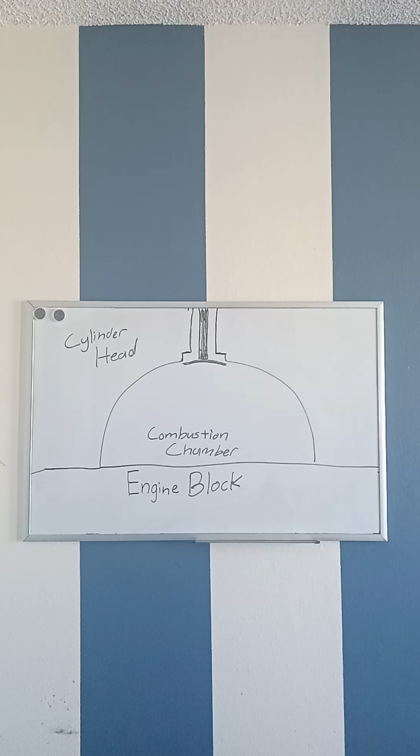Good afternoon everyone. I'm showing you guys the next stage of what we're doing on this LS swap build for this OBS project, turbocharged, using the L33. We've gone to the point of doing the porting and polishing for the cylinder heads, but we're also going to talk about the 3-angle valve job, and the camshaft we used.

So a lot of you guys want to know what a 3-angle valve job is. You see here, this upper part is our cylinder head, there's our engine block, there's a combustion chamber, and there's our valve.

Now on the valve, it comes up to seal to a flat surface here. You can see here 3 different angles. What happens is you try to get it to have a full seal. Having a 3-angle valve job is having the perfect angles on these sides here. Usually you do like a valve lap.

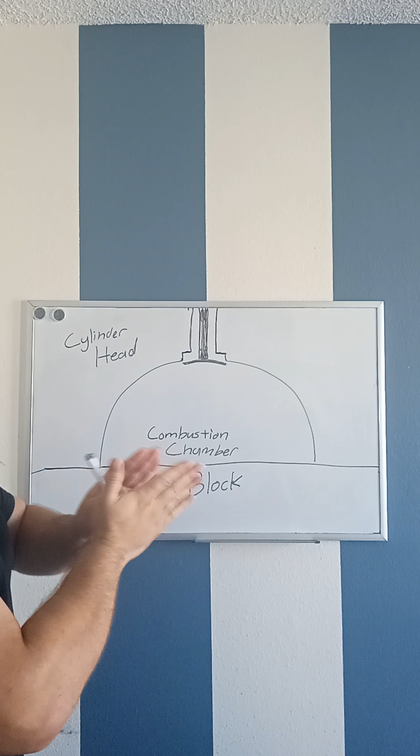There's also certain fluids you can use to help grab a hold, stick to a magnet onto your valve, press it into the angles, and scrape off, spinning it to a certain angle. You can use a drill, but I usually like to use my hand, just to scrape off any rough surfaces on the intake and exhaust ports of a cylinder head.

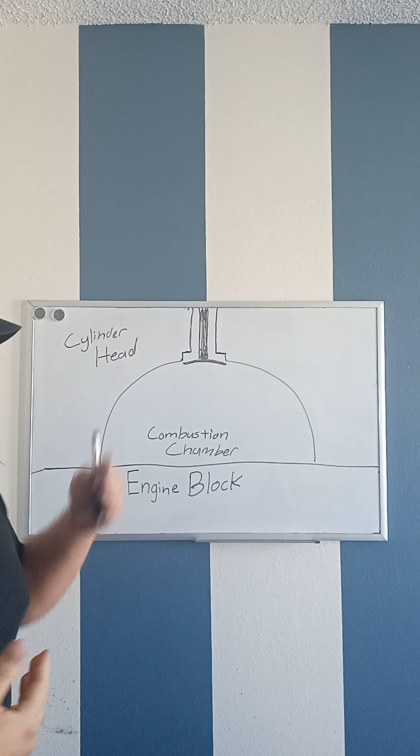Now what does it do? Just like resurfacing the cylinder head, it gives a smooth, flat surface so it loses no compression.

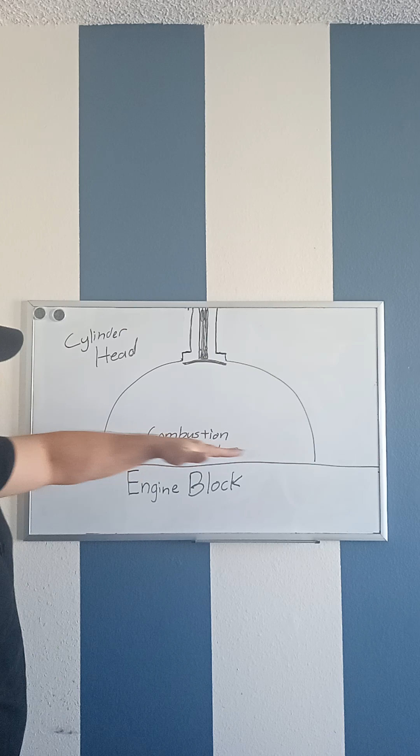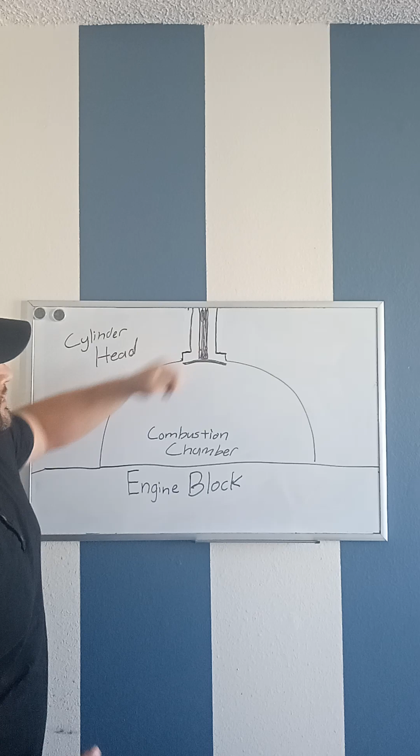When you have a 3-angle valve job, it helps this valve seal, but it also helps hold the compression on the intake and exhaust valves, just in case it was going to go out into the bowl of the valve. So what we're doing here is holding the compression to help us get the low end torque we need.

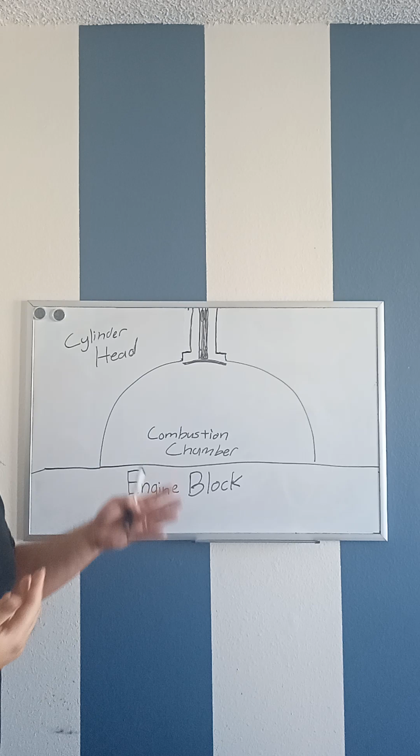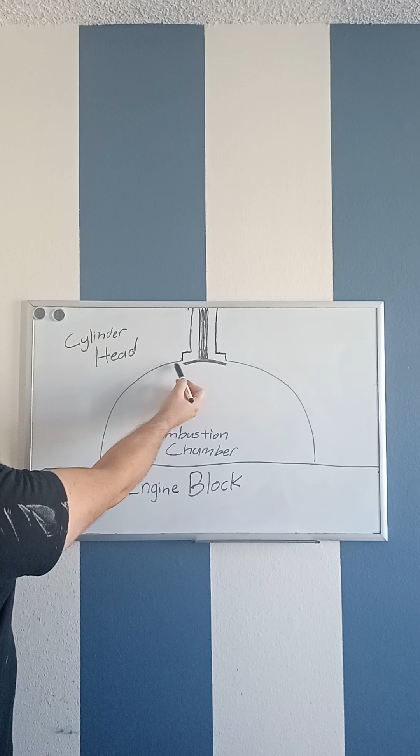That's the benefit of doing a 3-angle valve job. You see the combustion chamber goes into 1 angle, 2 angles, now 3 angles each side, to give it a smooth cast surface on all 3 angles, which is what they call a 3-angle valve job. Pretty simple, straightforward, and definitely recommended, especially if you're doing modifications onto your cylinder heads.

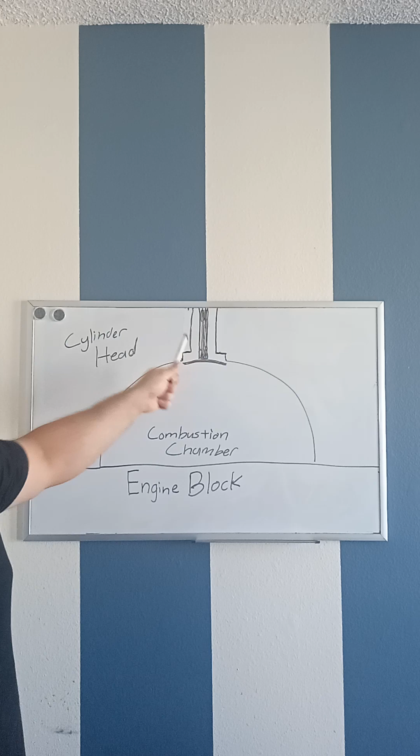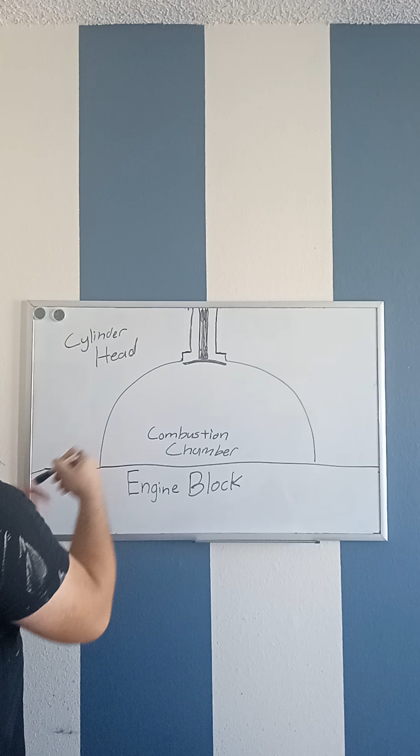As the next thing that can happen besides that - one thing that happens as well, when you have bent valves from damaged rocker arms, push rods, and such, is that valve would sometimes move around trying to seal and end up damaging the area. So instead of a straight, perfect 90-degree angle, it will go into like a flat surface.

Usually when that happens, you're looking at remachining, which could cost close to $1,000, maybe $2,000. Or in some cases, with cheap cylinder heads like basic 350 Vortec cylinder heads from the manufacturer, they just become junk. So that'll be it for the 3-angle valve job.

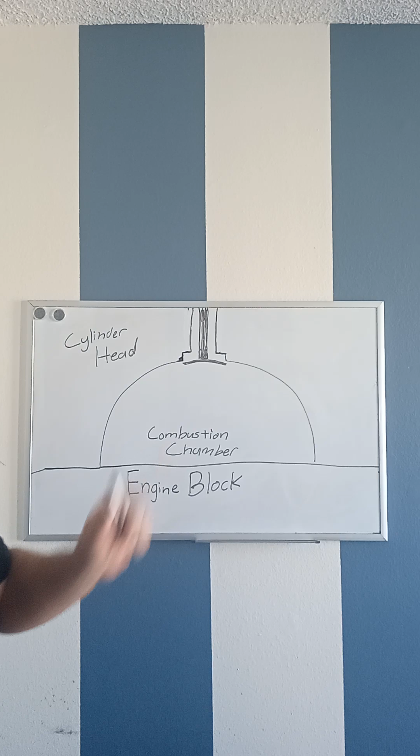It's very important, especially if you're doing modifications to cylinder heads, to do that 3-angle valve job guys. I'd recommend it so you don't have to come back later about losing that full seal or losing compression on your cylinder heads. Besides having a flat deck surface for your combustion chamber, the bottom of the cylinder head and engine block, that's the next thing to look for when you're doing that 3-angle valve job, whether you're doing a full build or just repairing your cylinder heads.

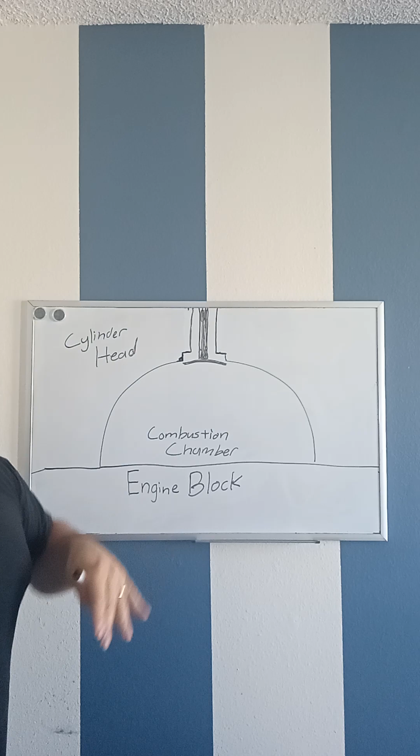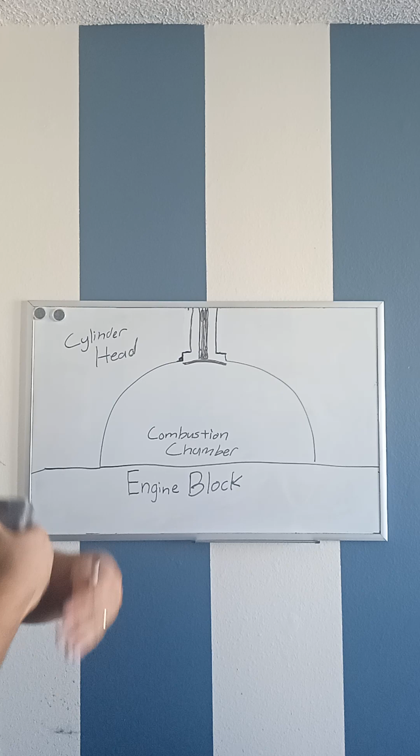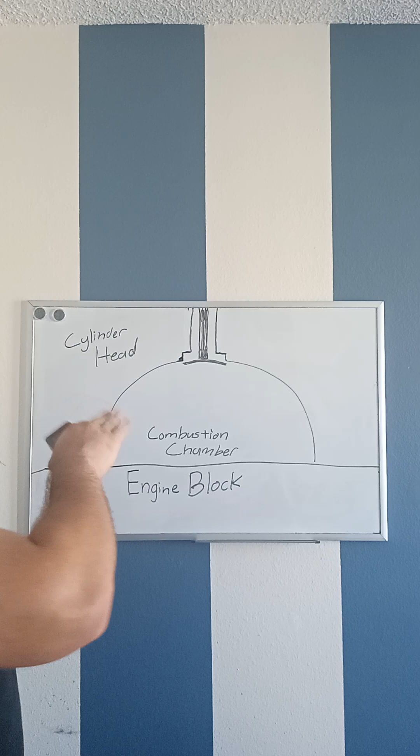Definitely check them all out, especially if you're going to be using any cylinder heads you've got. Doesn't matter, LS, Hemi, Coyote cylinder heads, basic 350s, 305s, old school Hemis, Magnum motors, small block Chevys - no matter, I'd definitely recommend doing that. So that's what we did for the L33, the 243 heads on the L33 5.3 block for our OBS LS swap. Let's move forward to the camshaft.

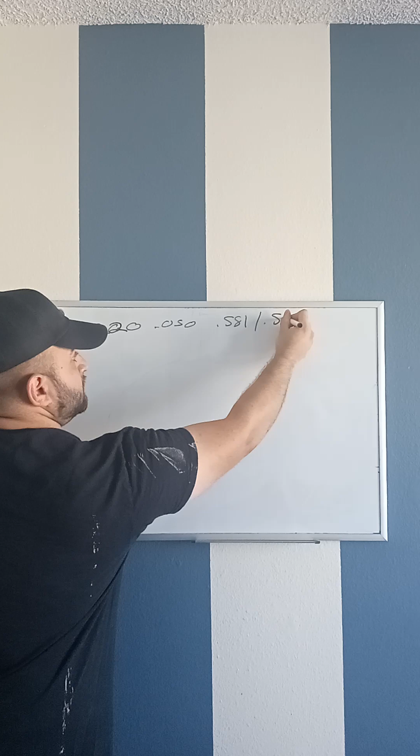Our camshaft we use is a 216, 220 at 50, with .581 thousandths of an inch lift on the intake, 580... I mean .581 on the intake, .580 exhaust, and a 114 LSA.

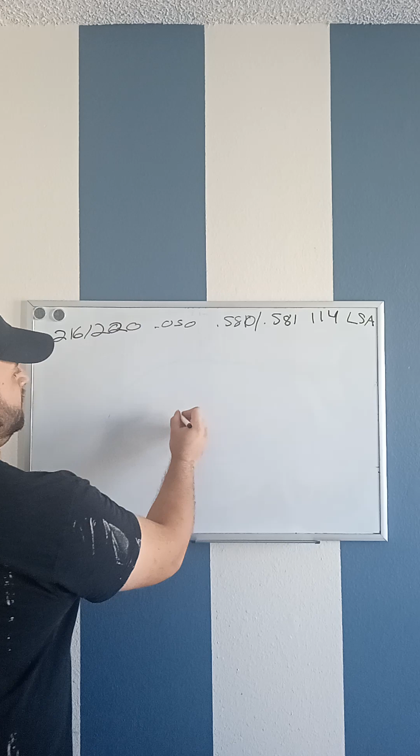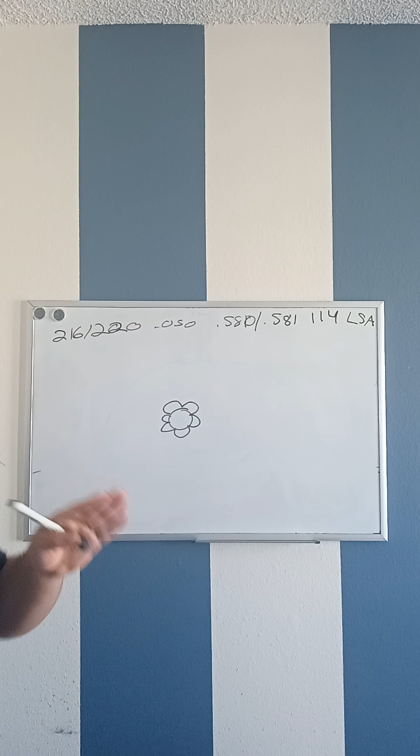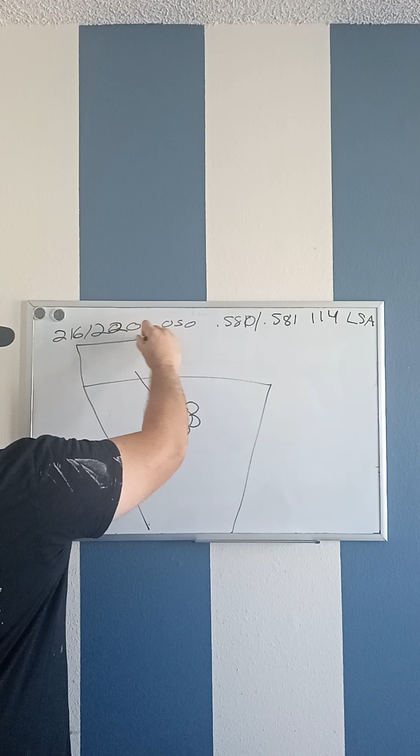So our camshaft, you can see here, these are our camshaft lobes. I covered in the past what the camshaft does, you can check out other parts for other builds. On our engine, it'll go through push rods to our cylinder heads to open up those valves.

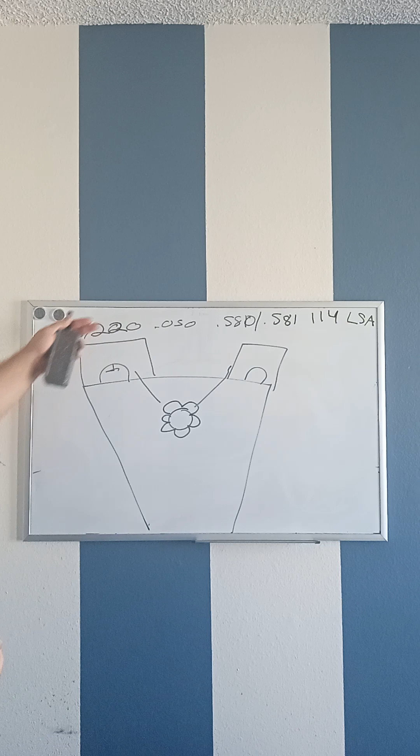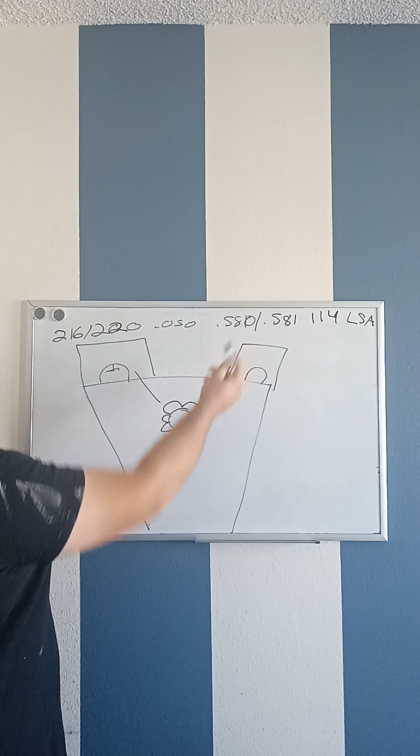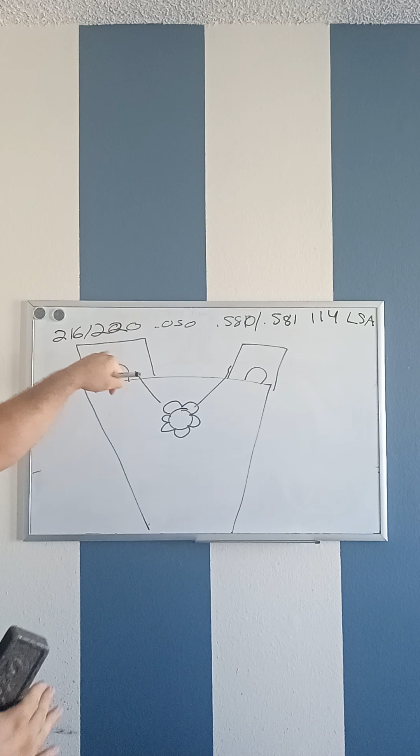For the intake, it controls how much air comes into the cylinder heads to the engine, 216 degrees duration, 220 degrees exhaust for a longer duration, to get the exhaust out. The stock lift on the L33 is usually at .490, so we gain almost a tenth of an inch lift on the intake and exhaust, letting more volume of air in at once to help with low end torque. So in this case, besides using 3.73 gears, with this duration on the camshaft, we're actually going to get more low end torque.

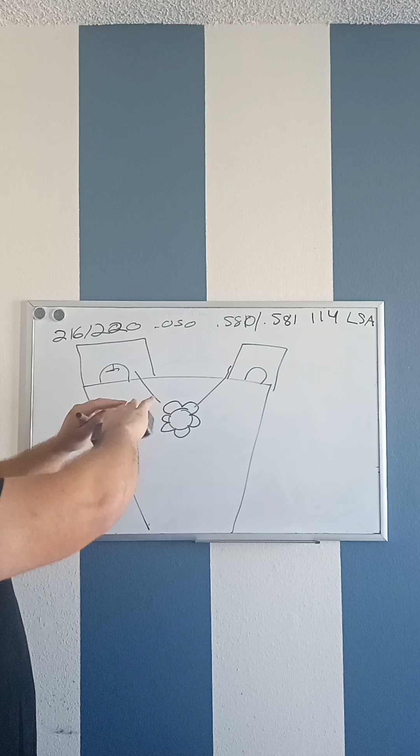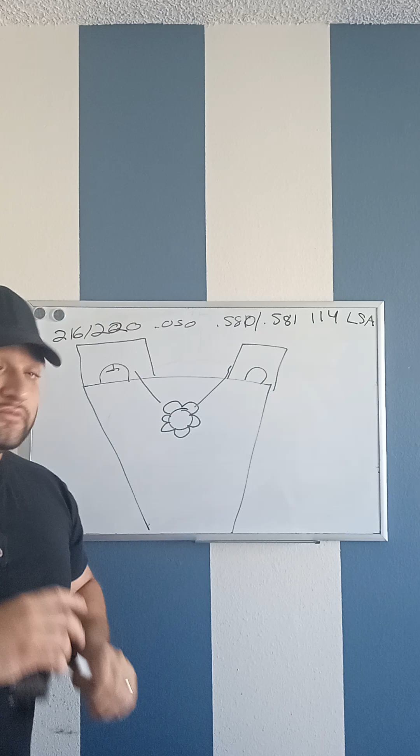114 LSA - you hear it in the fire when you hear a car going blow, blow, blow, blow. What it means is every firing cylinder going through the exhaust, the time duration is longer. Usually the smaller the LSA, the more choppy it is, regardless of the duration. Some people do that when they try to do the cylinders and do a ghost cam tune - they actually advance or retard the timing of the stock LSA on that camshaft.

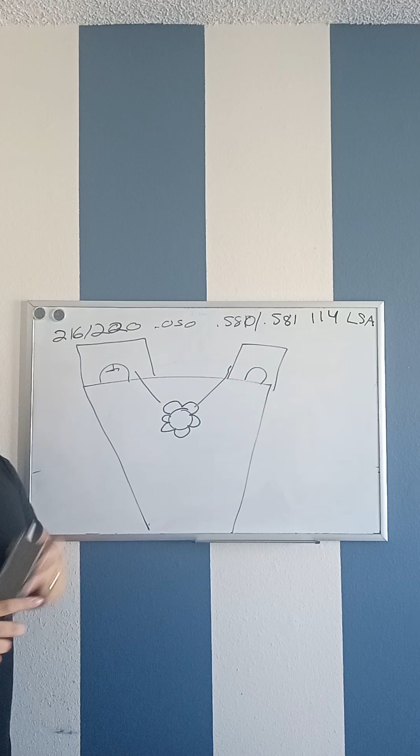That's the next part we're doing guys. We just finished covering the camshaft, the cylinder heads, and the 3-angle valve job we wanted to go over with you guys. If you're interested in checking out porting heads versus milling heads, or want more information, check us out.